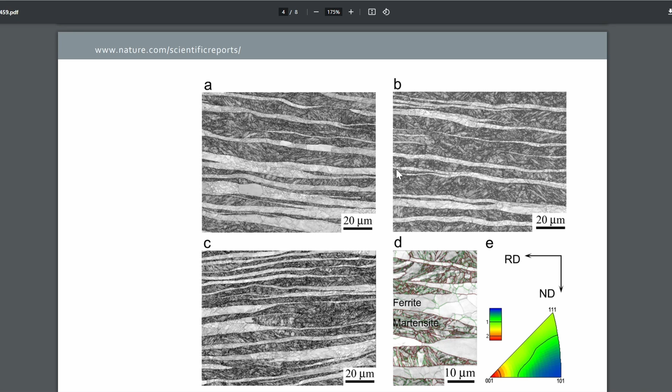Okay, so I pulled up this article, and this is the laminated ferrite/martensite microstructure that he's talking about. So in knives, we are familiar with laminated steels and Damascus, but this is not laminating two different steels together. The laminated microstructure it's talking about is within a single steel. So through specific alloying and processing, they hot rolled the steel where it had both phases, ferrite and austenite. And when they quenched the austenite, it formed hard martensite. So this is a mixture of soft ferrite and hard martensite. And it looks laminated because it was formed during hot rolling, so everything is elongated. So that's the first thing to mention.

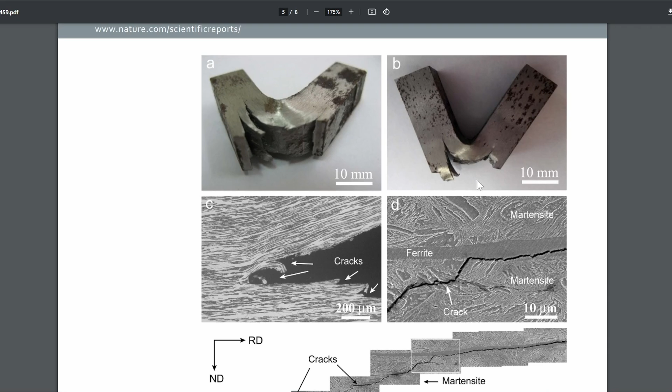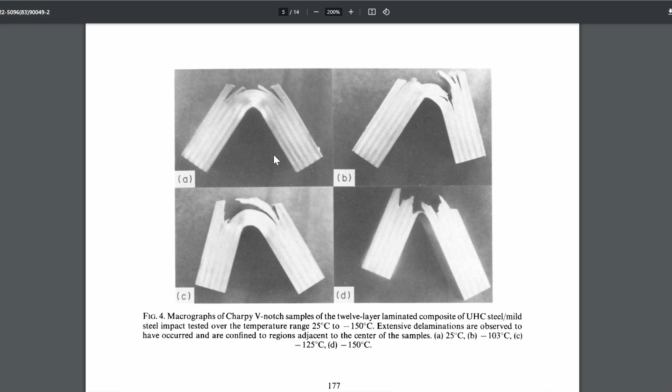And then they break it so that the crack goes through the layers, and that leads to a fracture that has to cross through the soft phases, and that leads to higher impact energy. Now, this is actually something I almost covered in one of my Damascus videos, because they have done studies where they've taken high carbon steel and low carbon steel and laminated it together and then broken them across the layers, and it does lead to higher toughness.

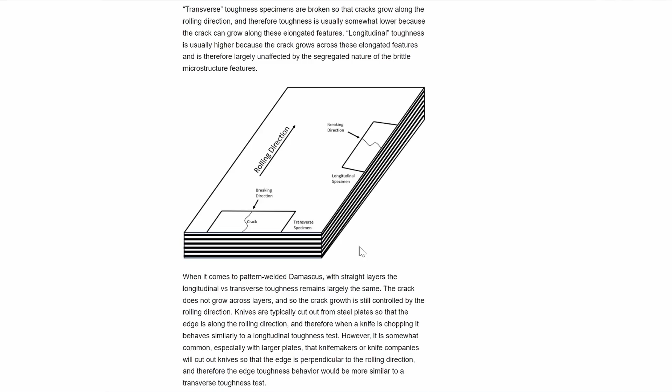Now, this doesn't always lead to a benefit. So I talked about this in the Damascus video, where with typical Damascus construction, we don't break through the layers. So when we take a laminated piece of steel, all of the layers are going in this direction. And then when we have an edge of a knife like this, here's our knife edge alongside our bar of steel. And then when we're chopping, let's say the crack has to grow this direction. So not through layers, but through all of the layers, we'll say. And when I tested toughness of these steels, having a tough steel mixed in with a harder or more wear-resistant steel, it did not increase the toughness. So the orientation matters a lot, and most Damascus or laminated constructions are not leading to higher toughness.

So that's one aspect. Maybe you can play around with orientations and get some interesting properties, but with most laminated steel, including the orientations they're talking about through hot rolling in this paper, it would not benefit edge toughness. It might benefit when you are flexing an entire blade. So let's say we have a San Mai blade and you have to break through those layers, or just Damascus in general. So that's sort of interesting, but breaking a whole blade I think is not quite as important as our edge toughness in general, but there are some interesting aspects there.

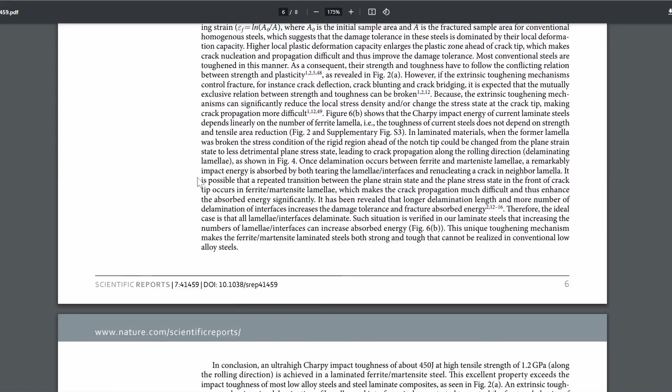This is just using values from standard charts. I didn't create whole new values for this, so they're going to be a little off, but they can represent what we're looking for. So if we look at 60 Rockwell C, that's about 2,200 megapascals tensile strength. So when we're looking at 1,500 megapascal tensile strength, we're in the mid 40s, maybe high 40s. So with the type of strength level that it's talking about, it's not exactly desirable for a knife, where we typically want to be above 55 Rockwell C.

Also, if we have a mixture of soft and hard phases along the edge, that is usually undesirable, because soft phases mean that we can get edge deformation. When you're just pulling a tensile bar until it breaks, the overall strength of the material is what matters. But when we're looking at an edge on a microscopic level, we need the whole edge to be strong and hard so that it resists deformation and stays sharp.

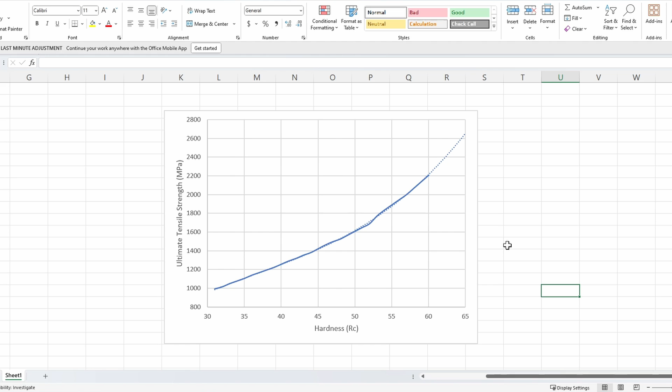So I think there are some interesting things in that paper. There are things to learn, I think, but would we want to mimic exactly what they did in that paper? The answer is no. Okay, next question from Delta Sheath.

I'm getting 80CrV2 from NJSB, that's New Jersey Steel Baron. I have an Evenheat furnace for heat treat. After seeing your video on 80CrV2, I'm left wondering if I should normalize and anneal my as-received 80CrV2, even though I am not forging, in order to reach the fine spheroidized microstructure and thus increase the final hardness of my 80CrV2. Okay.

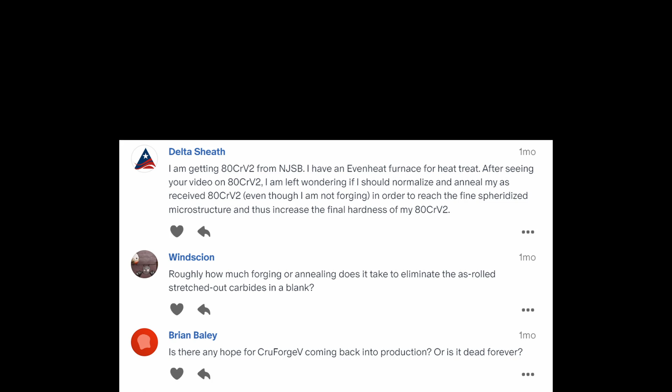So 80CrV2 is a relatively simple steel. It's got 0.8 carbon, 0.5 chromium, 0.2 vanadium. So it is a common steel for forging bladesmiths. However, some stock removal makers do use it. And he's asking, should he go through some type of normalizing process with his steel?

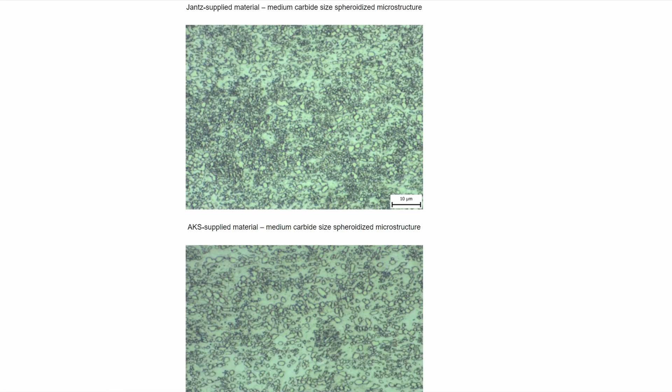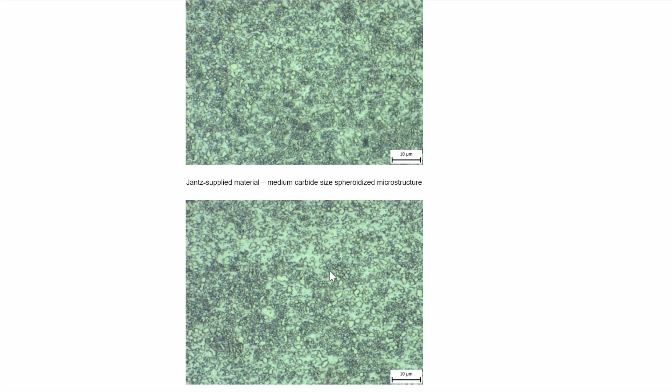So this is the structure of the New Jersey Steel Baron material. It's made by Buderus in Europe. And you can see that it has relatively coarse carbides. Then Alpha Knife Supply and Jantz sell material with more of a medium coarse microstructure, and it responds a bit differently to heat treating. And this is the microstructure from my recommended thermal cycling when you're forging it. So you can see the carbide structure is much finer.

And then New Jersey Steel Baron themselves also have a data sheet with a certain cycling procedure that I don't really recommend because it mostly results in pearlite, and I prefer spheroidized carbides. But this also changes how the steel heat treats and the resulting hardness and toughness.

So here is hardness versus austenitizing temperature for a 10 to 15 minute austenitize before quenching. So this is the Buderus material from New Jersey Steel Baron. You can see if you use 1525, as quenched you'll get 62.5, versus my recommended cycling where you would get 66 Rockwell as quenched. And to get that type of hardness with the Buderus material, you'd have to be up into the 1650 range, which is pretty hot for this type of steel.

When you start with pearlite, it can get even harder. With pearlite, you don't have much control over your hardness. You can see when it has a fine spheroidized microstructure, you can get different hardness levels depending on the austenitizing temperature you choose. For pearlite, even with 1475, it was already maxed out in hardness, and it can be difficult to get these nice curves where you can control your final hardness. Another reason why I don't generally recommend pearlitic starting microstructures.

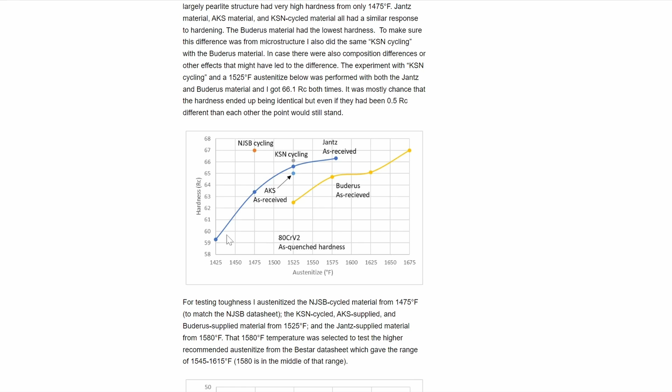But this can also affect the toughness. So here is my cycling using 1525, 400 degree temper. You get 30 foot-pounds in my test and 61.5 Rockwell or so. Whereas if you start with the Buderus material with the same heat treatment, you get only 58 Rockwell, and the toughness is no better, even though it's significantly softer. So you would have to austenitize hotter or temper lower to get the same hardness. And maybe the toughness goes down at that point.

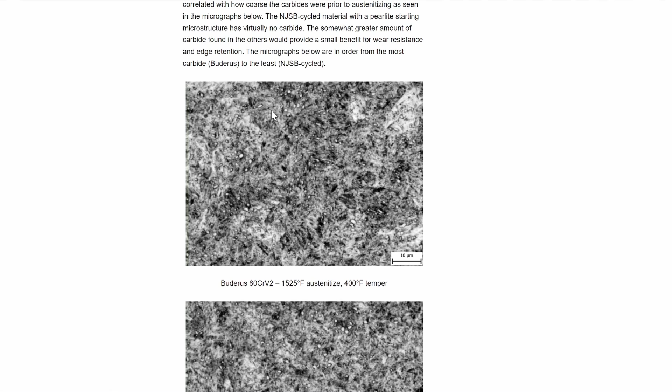So should you thermal cycle the steel to get something more like this than like this? It's totally up to you. I mean, these properties aren't terrible. It's a little soft. You can compensate with the heat treatment, but then the toughness may go down some. However, you do get a bit more carbide. You can see these little white particles. There are more carbides in this material than when you use my cycling, where the carbides are much smaller and there's a smaller volume of them.

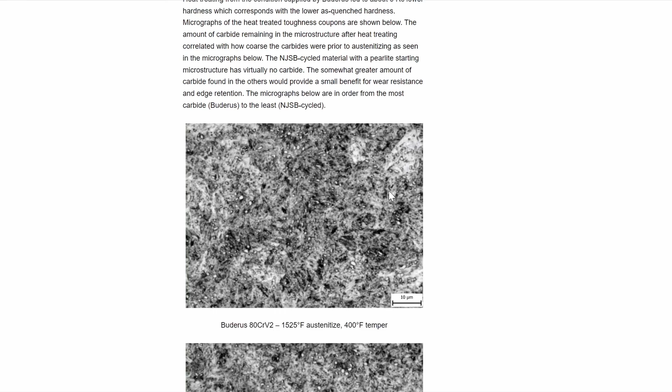So you might get a bit better edge retention, though your toughness-hardness balance is a bit reduced, and you're going to have to heat treat the steel hotter to get similar hardness. So it definitely doesn't hurt to go through the type of cycling that I recommend in this article to get the fine spheroidized structure. You can get a little bit higher hardness-toughness balance.

But, you know, is your customer going to tell the difference? That is always hard to say. You know, it's not like this Buderus material following a generic heat treatment is bad or terrible. But could it be optimized more? Probably.

So manganese sulfides, all steel has at least a little bit of sulfur in it that combines with manganese, and it forms these particles called manganese sulfides, and they are soft at forging temperature, and so they elongate during hot rolling. Now, knife steels also usually have a lot of carbide, and the carbide also gets elongated and you get these stringers, they are called.

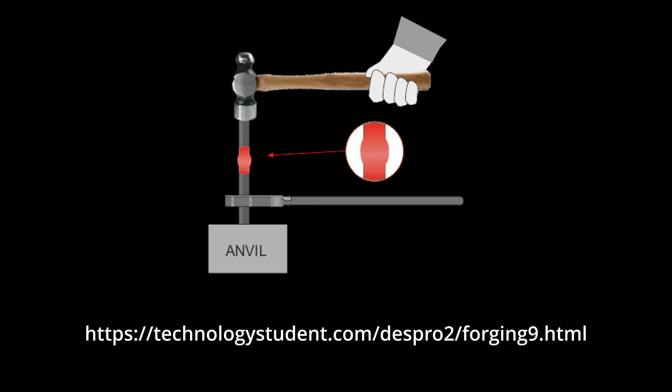Now, can you eliminate that by forging a knife? No, not with a small amount of material. What you'd have to do is called upset forging, where you would forge in the opposite direction of the rolling direction. So you'd have to like turn a bar vertical in a forging press and then forge it down. But, you know, you almost always have to elongate steel, and upset forging doesn't eliminate all of this segregation, but it can help. There are some papers on this, but it's a difficult process.

How much you would have to do would depend on the steel and how much of these elongated stringers you have or manganese sulfides. I don't think there's a realistic way to get rid of them. This is what processing like powder metallurgy is for. It helps reduce the amount of segregation that occurs, and you get less directionality in the toughness.

All right, from Brian Bailey, is there any hope for CruForgeV coming back into production, or is it dead forever? Well, CruForgeV I have written about before. So it came out in like the mid-late 2000s. It was a steel that was designed for forging that would have some vanadium addition, so 0.75%, to have some wear resistance, because most steels used by forging bladesmiths are pretty low in wear resistance.

And the steel, okay, it came out in 2009. They made 40,000 pounds of it, but Crucible went through a bankruptcy shortly after, and they basically offloaded all of this steel. More of it is still out there that you can buy, and it sells pretty slowly. And when I have brought up CruForgeV with Crucible people, they have never mentioned any interest in making the steel. The response to the new steel was pretty muted. To this day, it's not that popular.

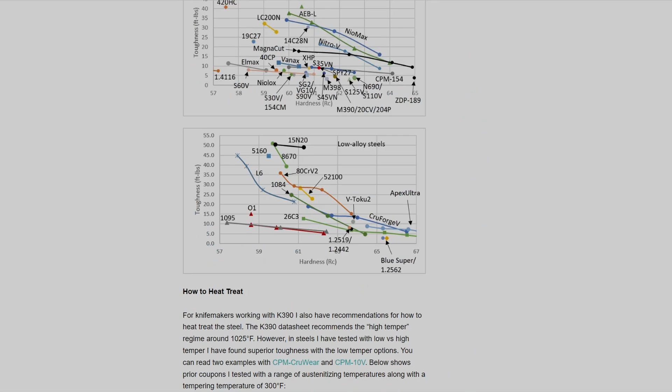Okay, the next question from Brian Bailey. What is the one property or component of steel you find most intriguing and has the most useful or desirable effects for knives and cutting edges, especially where it does not get the interest or attention it deserves? Okay, I think one property is hardness, toughness, balance. So for any steel, as you heat treat it harder, typically the toughness goes down.

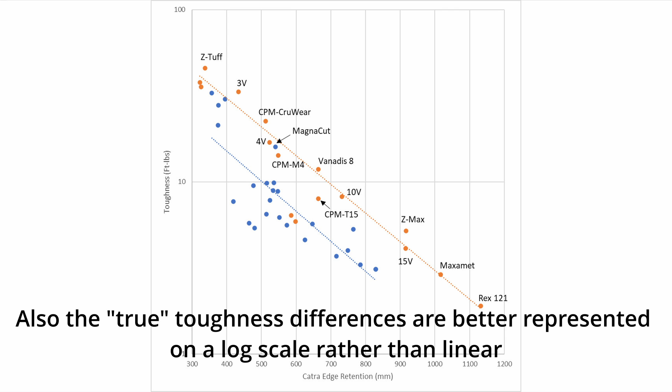And these can be substantial differences. Dropping a knife on the ground, it'll snap if it's Rex 121 and maybe not if it's Rex 76. So trying to get steels that are balanced, where they have good wear resistance but good enough toughness where they are still usable at high hardness, is important. And this was one of the things I was looking for with MagnaCut, that it would be balanced where it could be used at high

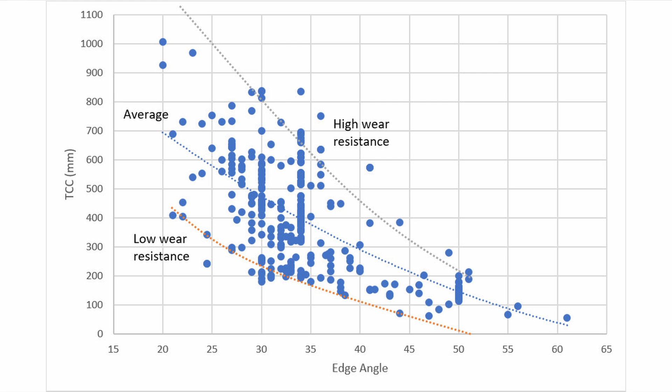hardness if desired to give thin edges where you want, because a thin edge cuts longer. If you go to a more acute edge angle, that has a much bigger impact on your edge retention than the wear resistance. So having a balanced steel can lead to better edge retention if it has the appropriate geometry. And that's one of the reasons why I made MagnaCut the way that I did.

Next question. Why is there no equivalent of the CATRA test for cooking knives where abrasion resistance is not much of a consideration? Okay, so the CATRA test is a slicing edge retention test. It's primarily controlled by abrasive wear resistance, as Robert said. However, I don't know if it has no effect on cooking knives. I've seen many claims from many kitchen knife enthusiasts where they have said that their more wear-resistant steels cut longer in the kitchen, and I have noticed this as well.

There can be complicating factors like higher hardness versus lower hardness, but often people will compare their white steel knives at pretty high hardness to higher wear resistance steels at similar hardness, and many people will say that their high wear resistance steels cut longer. But why is there no equivalent for cooking knives? Well, if we're not talking about abrasion resistance, we're talking about some other failure mode.

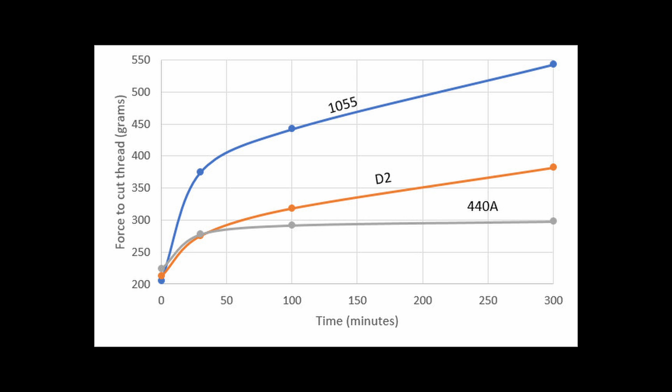So we were discussing strength and hardness to resist deformation. We were talking about toughness to resist chipping, or we can add in corrosion resistance because in the kitchen we can be cutting acidic foods, which can lead to corrosion of the edge and loss of sharpness. I did a study on this a long time ago where I dipped knives in lemon juice and then measured the sharpness after, and the sharpness would go down with exposure to lemon juice.

So to have an equivalent for cooking knives, you'd have to be measuring one or more of those properties. So CATRA is just abrasion resistance. Hardness is just a measure of strength or hardness. The impact test is just a test of impact toughness. And when we do what are called real-world tests, typically we're combining those properties in some way that's supposed to represent real-world use. But that is difficult to do because a thinner edge is going to behave differently than a thicker edge. So what would be your standard procedure?

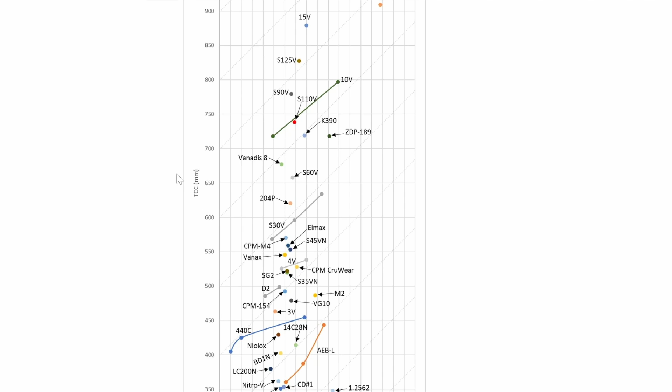You know, would you whack a knife into a cutting board a bunch of times to have a combination of strength and toughness or something? People can come up with these kinds of tests. Or you can look for steels that have the highest hardness-toughness balance like we were discussing before. If abrasion resistance really doesn't matter, then you want maximum hardness and maximum toughness. And maybe there's some balance there. So those are things you could look at, Robert.

Stacy asks, does bainite have a place in knives? So I have talked about bainite before. What is bainite? Do I have a good chart here? Well, to talk about the potential benefits of bainite, this is quench and tempered, meaning normal martensite: you heat it up hot, you quench it in oil, then you temper it at a low temperature, versus an austemper. And this old chart shown in a bunch of old handbooks that I recreated here, 53 Rockwell C 1095, the austempered, that means bainite, was way tougher than the quench and tempered.

So bainite, very attractive. So what they do with bainite is instead of quenching and then tempering, they quench to an intermediate temperature like 400, 500, 600 degrees Fahrenheit and then hold it there for some long period of time, and it forms a phase called bainite, which looks sort of like tempered martensite, but it has somewhat different properties.

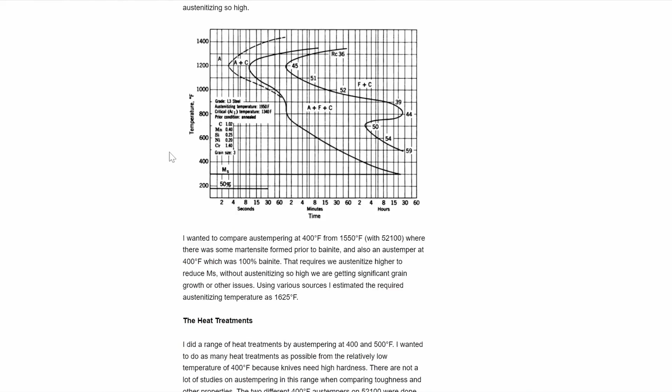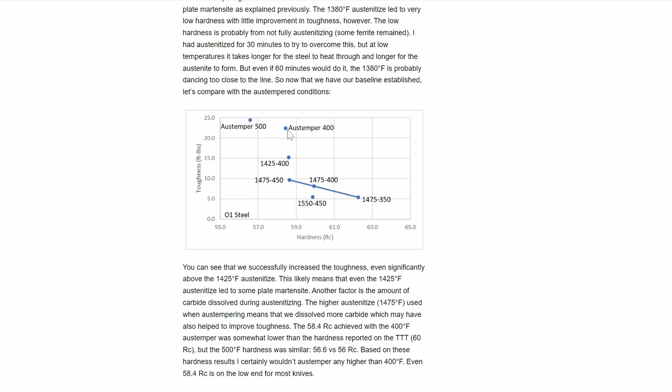However, with the same austempering treatment, I got over 20 foot-pounds. So a benefit of austempering can be high toughness at sort of intermediate hardness levels. The reason why it does this is because martensite has an issue called tempered martensite embrittlement.

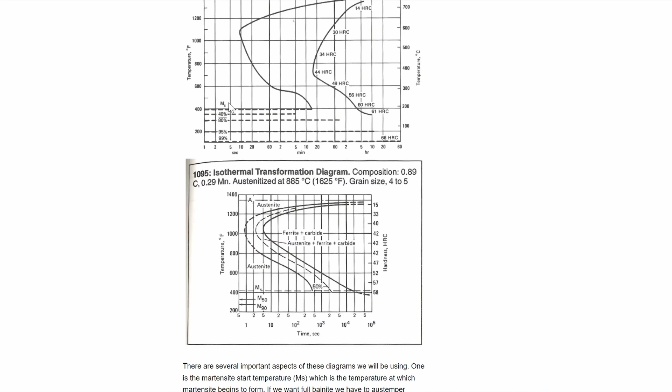But what if you want to have something in the 59 Rockwell range with improved toughness? Well, a good way of doing that is to use an austemper. So we would hold the steel at some intermediate temperature above martensite and get in that 58, 59 Rockwell range. To have one more example, I did the same thing with 52100.

So 52100, I got quite high toughness in the range of 57 to 59 Rockwell by austempering from 400 to 500 degrees Fahrenheit. But if I austenitized hotter to get higher hardness with 1625, then the hardness got higher, but then it looks very similar to the hardness-toughness balance of normal quench and temper.

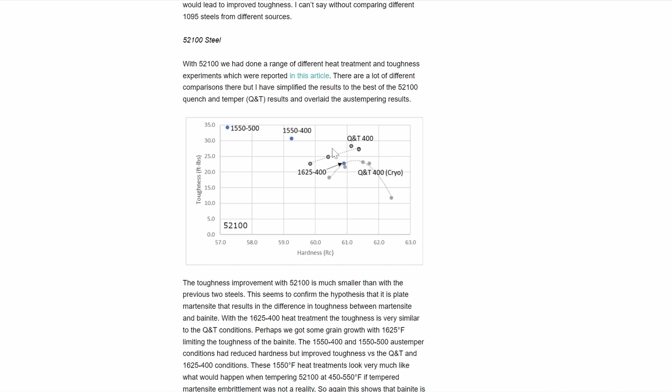So austempering can be useful for intermediate hardness ranges, let's say for axes or really large knives. But for thin cutting knives, quench and temper is usually the way to go.

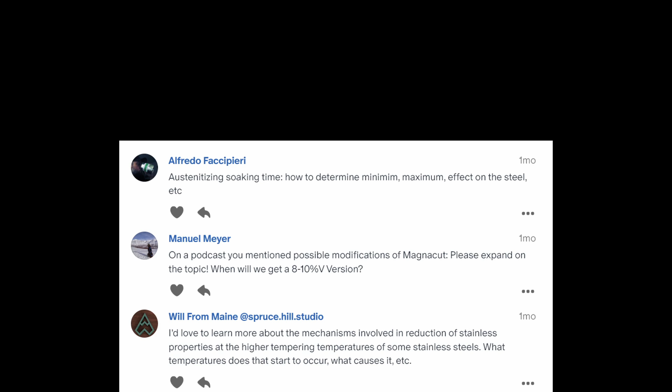Okay, question from Alfredo. Austenitizing soaking time. How to determine minimum, maximum, effect on steel, etc. Okay, so austenitizing. There's a couple of things we do during austenitizing. Austenitizing is the step where we heat to high temperature prior to quenching, such as in oil or in air. It depends on the steel.

So the main things we want to do are soak the steel throughout. So, if it's cold in the middle, it has been insufficiently soaked. That is relatively obvious, I think. The other things we want to happen are the transformation in the steel. So the steel has to transform from magnetic ferrite to the non-magnetic austenite before you quench.

And we also need to dissolve enough carbide to get carbon and other alloying elements in solution prior to quenching. Carbon is the element that gives us the hardness that we need, so it needs to have enough carbon in solution prior to quenching. We lock in that carbon, and it makes really hard martensite. The more carbon in the martensite, the harder it is.

So this is a chart for 52100 where they simulated carbon and chromium in solution versus austenitizing time. You can see that at the beginning, the change in carbon is very steep, and then it flattens out with enough time. And so if you get above this 10-minute line, then we're in a very flat region.

And so even if you are off by 10 seconds one direction or another, or using a thicker piece of steel, if we just use 15 minutes or so, we'd be in this flat region. And even with different knives or the steel heating up at a different rate, blah, blah, blah, it's going to be pretty flat in terms of properties.

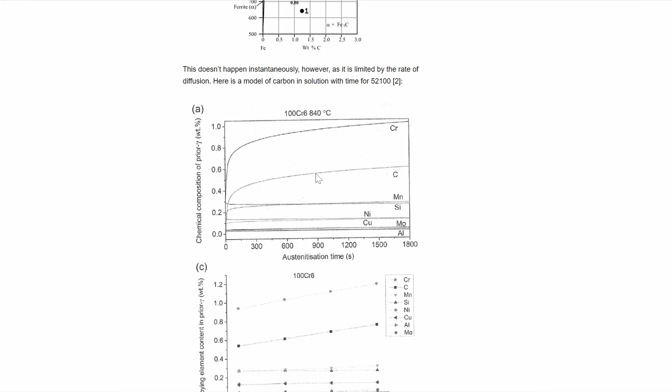So don't be afraid of soaking. Soak your steel like it says on the data sheet. The data sheet usually gives a recommended austenitizing time. Sometimes it even changes the austenitizing time based on the temperature you choose, because the hotter you go, the shorter the necessary hold time. But my general recommendation, don't be afraid of soak time.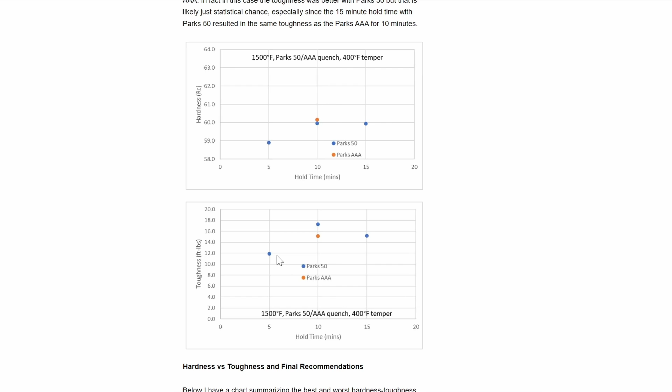Make sure you're soaking long enough. Usually over soaking is not as likely as under soaking, especially with the types of soaking times that knife makers are using in the 10 or 15 minute range.

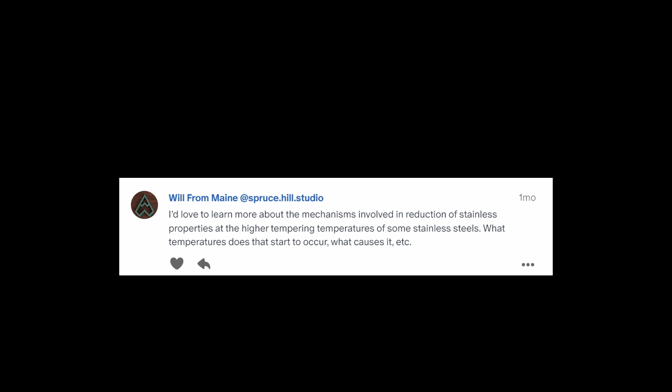Okay, one more question. I'd love to learn more about the mechanisms involved in reduction of stainless properties at the higher tempering temperatures of some stainless steels. What temperature does that start to occur? What causes it, etc.? Okay, here is the Vanax steel datasheet,

and you can see that as we temper hotter, this is 200 degrees Celsius, it would go up even a little higher in hardness with a lower tempering temperature. And then it goes down in hardness as we temper hotter and hotter. And then it starts to go up in hardness again, and then peaks around 500 Celsius or 950 Fahrenheit, something like that, before it drops down again.

So what happens is that we get alloy carbides that precipitate. They're really tiny carbides that look like this. Really, really tiny carbides. You wouldn't even see them with optical microscopy. And they're so tiny that they increase the hardness of the steel. And at the high temperature range, you get alloy carbides that precipitate. At low temperature, you get carbide precipitation as well, but it's iron carbide. At high temperature, you get chromium, molybdenum, vanadium carbides that form.

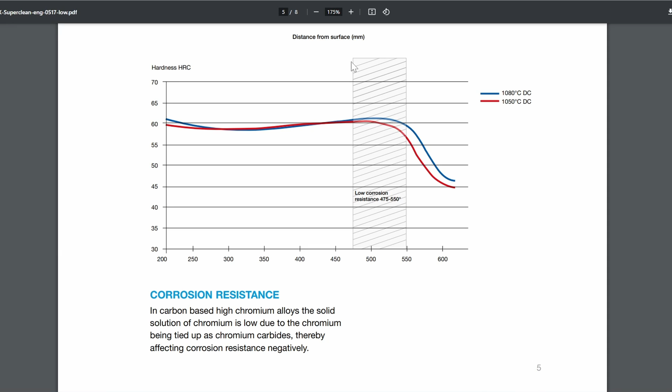And if you are losing chromium in solution and forming carbides, that is less chromium to form your protective chromium oxide layer, because what makes stainless steel stainless is chromium oxide at the surface. And if the chromium is already tied up with carbon, then it can't form with oxygen to form your protective chromium oxide passive layer. And you can also see here it actually says low corrosion resistance in that range for Vanax. I have done this experiment myself with Vanax.

But this tempering practice is actually quite common. It helps with knife companies when they want to put coatings on the steel that require higher temperatures, like 500 degrees, 600 degrees to put on there. The other thing is, if you've tempered at 1,000 degrees, the steel is less prone to overheating. So when they're grinding and sharpening, they're heating up the edge of the steel, and that can temper it to lower hardness. But if it's already been tempered at 1,000 degrees, they can heat up the steel to about 1,000 degrees without affecting the heat treatment. So this can be quite common to temper in this range.

I don't normally recommend it, because it can also reduce toughness along with corrosion resistance. This is Z-Wear or CPM CruWear tempered at 1,000 degrees versus 400 degrees, and the 400 degree tempering led to a higher hardness toughness balance. I guess the theme of this Q&A is hardness toughness balance. So 400 degrees tempering led to a better hardness toughness balance.

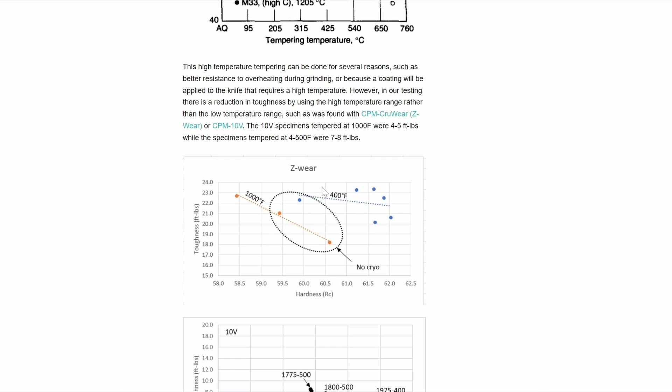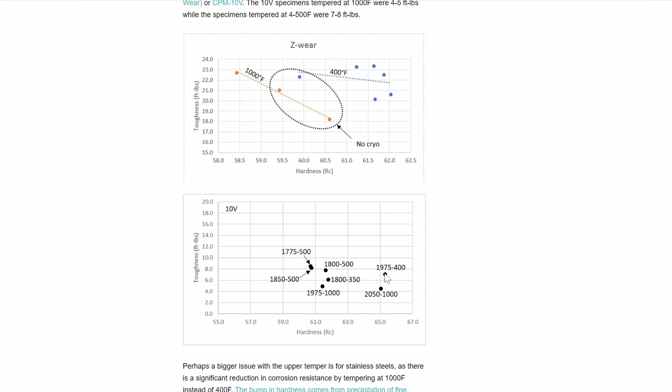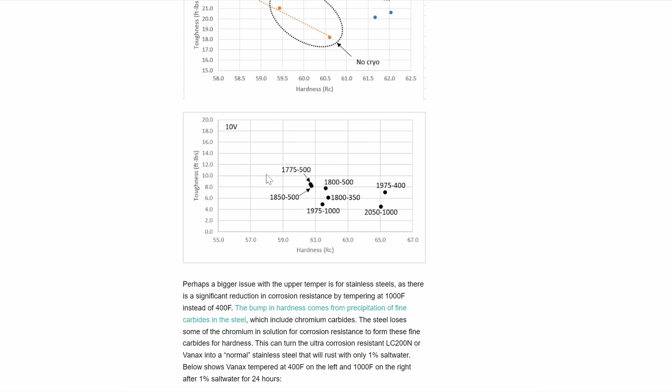Similar with 10V, these are the 1,000 degree tempers down here, where we got between 4 and 5 foot-pounds. And when we tempered between 400 and 500 degrees, we got around 7 to 8 foot-pounds. So a significant improvement in toughness at the same hardness. So a reduction in corrosion resistance, a small reduction in toughness. I prefer tempering in the low temperature regime rather than the high temperature regime.